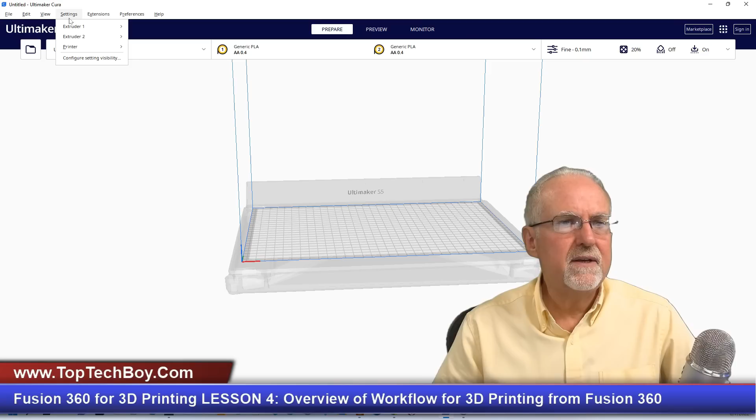And guys, I can't make these menus bigger and I can't make them higher contrast. So I'm going to tell you carefully what I am doing and then give you a chance to follow along. Up at the top, you click on settings, then you come to printer, and then under printer, you are going to say add a printer.

You see that you can add a networked printer or a non-networked printer. We are going to want to do a non-networked printer, so I'm going to expand that by clicking here. If you're working with me, we don't have the Ultimaker, we have the Creality. So we scroll down till we find Creality. There it is. It says Creality 3D. We're going to expand that, and then we'll come down looking for Creality Ender.

It looks like there is the Creality Ender 3, the Creality Ender 3 Max, the Creality Ender 3 Pro. I think that probably just the Creality Ender is going to be a good choice, and you could tweak things further. If you know exactly precisely what you have, you can select the other one. Or if you're doing a different printer, just find your printer on the list. This list has most printers.

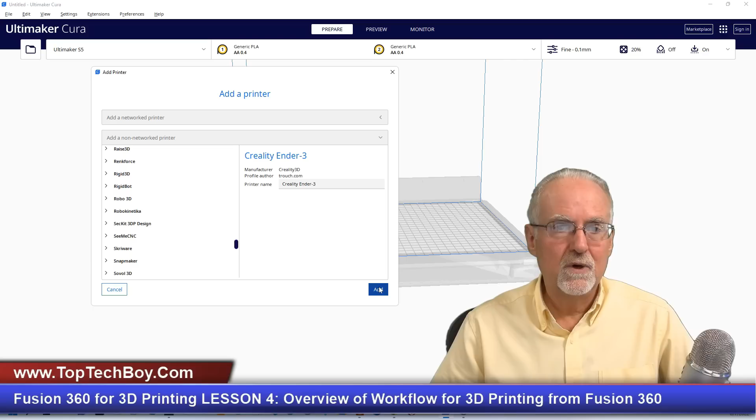Okay, that is pretty cool. We're going to say add, and now we're just going to go with the defaults. We're not going to really change anything here. We're just going to go with the defaults, and then we're going to say next. And now what we just make sure is we come over here, and we select that. You make sure of the available printers, you select that. So now this is ready to slice. So we've got Cura up.

So what is the overall design process? You go to Fusion 360, okay? You sketch a two-dimensional object. Then you extrude the two-dimensional sketch into a three-dimensional object. Now, you export that as an STL file because you can't print a Fusion 360 design file. You have to go from Fusion 360, you have to export a .stl file. Now that is going to be saved on your local computer.

Once you have that .stl file, you pull that .stl file into the Cura slicer, and you get it situated on the build plate. Then you have the STL file. Now you actually have to slice it, and that slicing process creates what is called G-code. And G-code is actually the specific detailed commands that are sent to the printer, like move to this XYZ position, extrude the filament, move, extrude, and it's got like the speeds, the extrude rate.

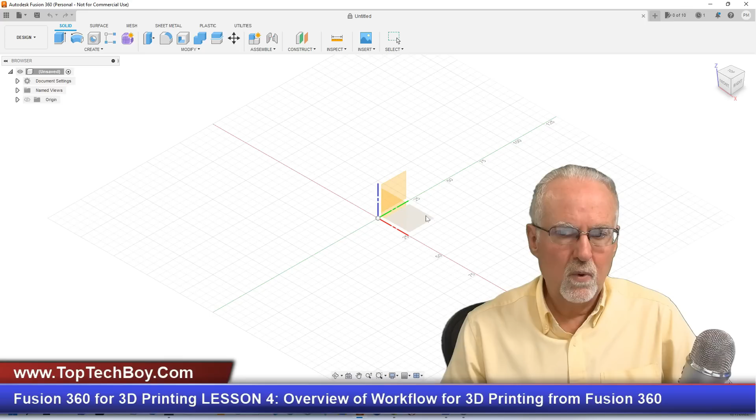So when I say create, it shows me this coordinate axis. Where do I want to design? I want to design on the XY plane, and that would be the what? The red-green plane. So I'll come over here and point. You see, when I point here, that is the plane between the red and the green axis, between the X and the Y axis. So pointing at that, I click, and then it gives me that plane to design on.

I'm kind of surprised. Usually I would have expected that to kind of make this sort of flat to me. And so I need to do that, and I think I would do that by clicking. You see this cube up here? I'm going to click on top, and now I'm looking straight down on what looks like a piece of graph paper. That is the XY plane. It gives me kind of a graph there that helps me draw.

So what did I want to do? I want to make a cylinder. A cylinder starts as a what? As a circle. Now, when I said create sketch, I want you to see that we are in sketch mode here. How do I know that? Well, these things change to two-dimensional objects from three-dimensional objects that they were a while ago. And I have this sketch palette here.

You have to always be mindful. Are you in sketch mode or are you in 3D mode? We said create sketch, so we are in sketch mode. And so we are given an option of two-dimensional figures that we can draw. And one of them is a circle. Now, besides these simple things, you can look here under create and see you can make a line, rectangle, circle, arc, polygon. There's all these different things you can sketch with, but we are starting very simply with a circle.

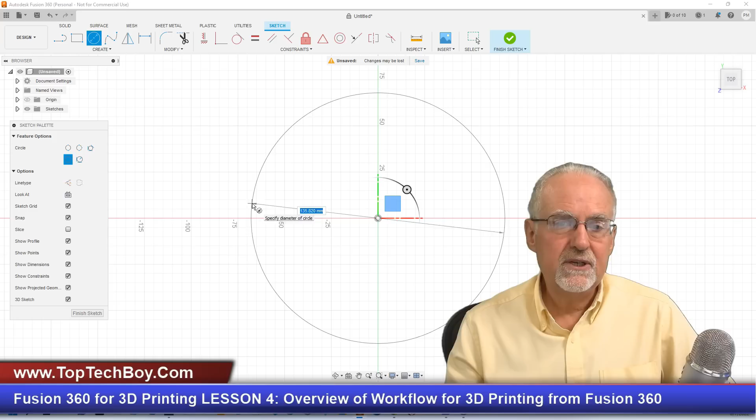The way we are deliberate about dimension is, instead of just clicking or eyeballing it, do you see that it is giving me, on this diameter that is drawn, a radius? It looks like that is a diameter, the way they've drawn it. Yes, and it says specify diameter of the circle. Well, I think I am going to make the circle 35 millimeters.

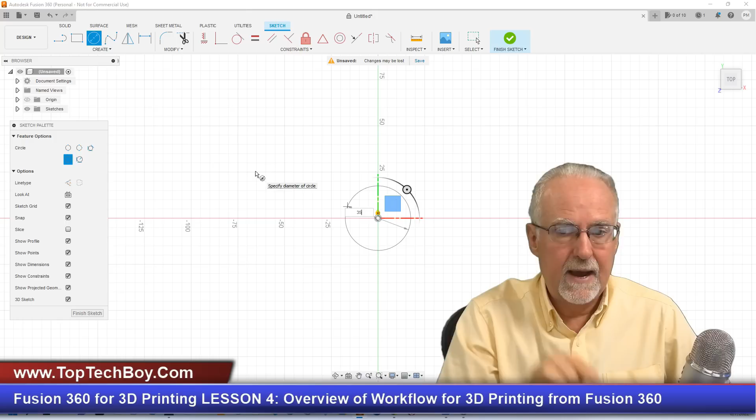Okay, 35 millimeters. Now I have been precise about what? About dimension. I click enter. And now I have this circle. The diameter is 35 millimeters and it is centered at the origin. Does that make sense? I hope it does.

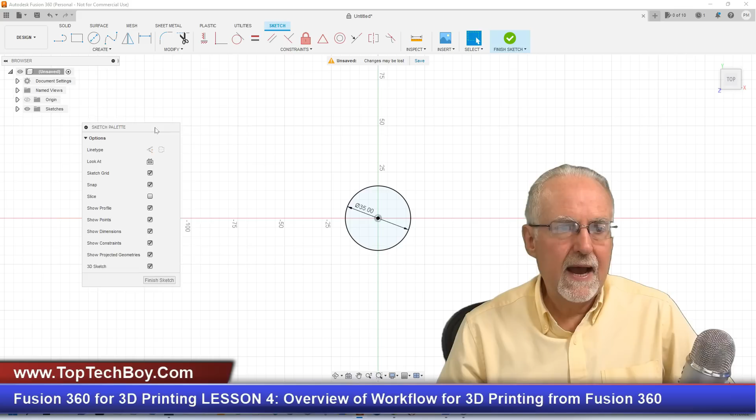Because we have been deliberate about the position and about the dimension, I want you to see that it turns black. And then if we look over here under sketches, you can see that my sketch 1, where we're working, has a little lock. And that little lock means that I have fully constrained it. I've been deliberate about where it is and what the size is. Okay, and that's very important.

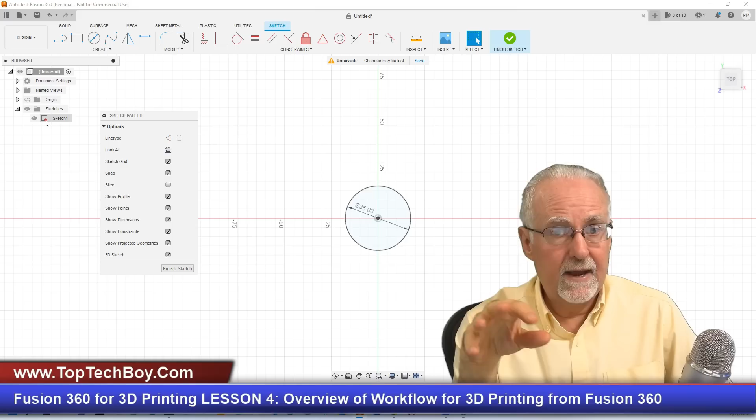You really don't want to move on until everything is black and you get that lock, that you have fully constrained your model. And then I could say finish sketch. Okay, and there is my sketch, but now I am back in what? 3D mode. And the way that I can see that better is if I come up here and I click on the little house, it gives me a 3D view from kind of a 45-degree angle, okay?

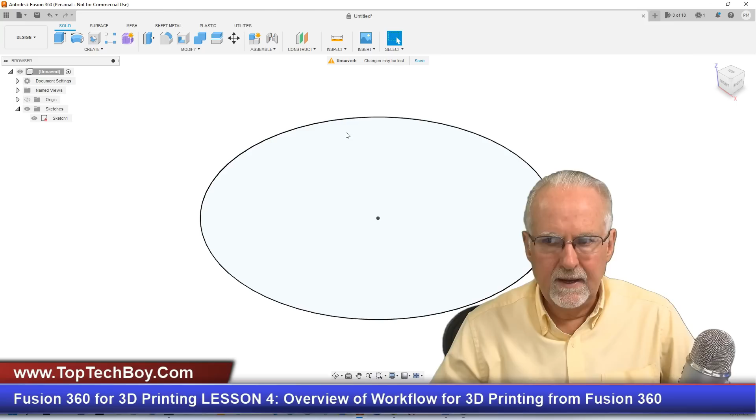But now I want to go back and edit that sketch, so I'm going to right mouse click on that sketch. I'm going to go back to sketch mode by saying edit sketch. Now you see I'm back in sketch mode. I've got my sketch palette, and I am going to click on that and click delete, and I am just going to delete it.

Now let me show you the wrong way to do it. We just get this and then we come up here, we click, and then we go like that. And then when I did that, notice now that it is blue and it is not black. And if we look over here at the little sketch label now, it doesn't have that little lock.

Why? Because I was very deliberate about position, but I was not deliberate about dimension. Well, it's best to put the dimension in when you create it, but I could come back now and put dimension by clicking on this sketch dimension tool here, and then clicking on the circle

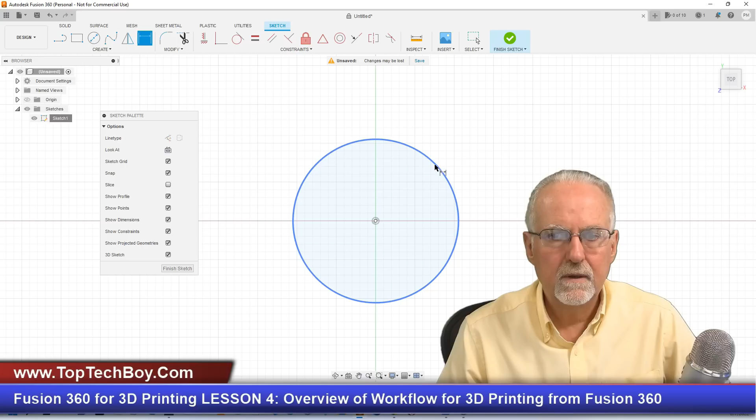like that. Okay, click on the radius of the circle, and now I've got a little dimension box, and I can say 35, enter, boom. What do I have? A solid black circle, and it is fully constrained because I have declared the dimension and the position. Okay, so now we're going to say finish sketch, and we're going to click on the little house to get a 3D view.

Now, how do you zoom in and how do you zoom out? It is the roller wheel on the mouse. So I can turn that wheel to zoom out. I can turn that wheel to zoom in. And also notice that how it zooms depends on where the mouse is. Here you see I'm to the left and it goes like that. If I come over here, it goes like that.

What if it's not in the center? How could I get it in the center? I could kind of zoom it over here and get it more in the center. You see how you can move it by zooming? And what if I just want it to zoom without moving? I could put it kind of in the center and then I can zoom it without moving. So that's just a little bit about mouse wheel zooms, and where the thing goes as you zoom depends on where your mouse is.

Okay, now this is a what? It's a two-dimensional object. It is a sketch. I want to create a three-dimensional object, so I come up here and I say extrude, okay?

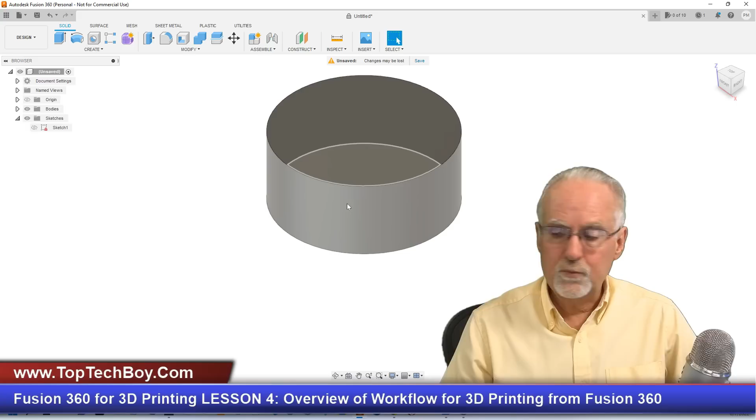But instead of just doing it visually, I'm going to come over here, and I'm going to put a number in, 15 millimeters. And then enter. Now this has a diameter of 35 and it has a height of 15. Very deliberate. And so now this would be something that is ready to print, but I can't help it. We're just going to do a little more in Fusion 360 and then we'll move over and print.

Okay, so I'm going to go back here. And now I'm going to go back to the sketch view. How do I do that? I can point at my sketch, and I could have lots of sketches, and so it's good if you name them, but this is the only sketch, so I point at it, I right mouse click, and I say edit sketch. Now I am ready to edit the sketch.

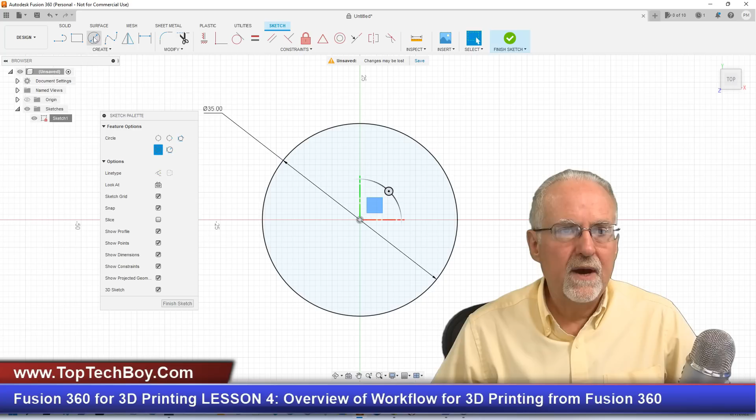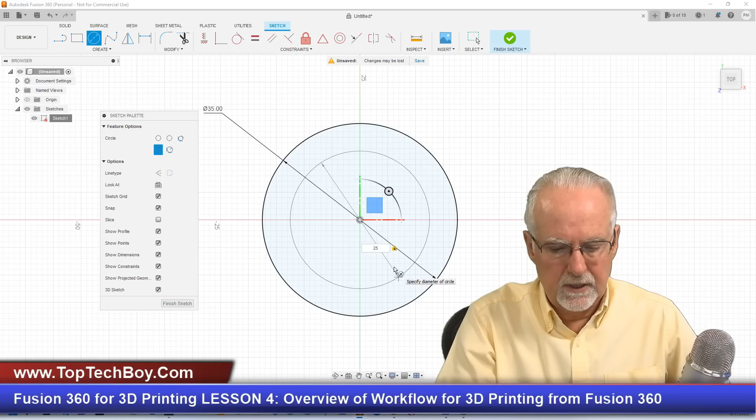What I'm going to do is I am going to create another circle, and then I'm going to be deliberate about position. I'm starting at the origin. I click, I drag, and now what am I going to do? This was 35 outside diameter, and so I want an inside diameter. What if I make it 25? Hey, that looks pretty good. Now I have a circle inside of a circle. And look, it's fully constrained because I have the little lock here. Very good. Now I'm going to say finish sketch.

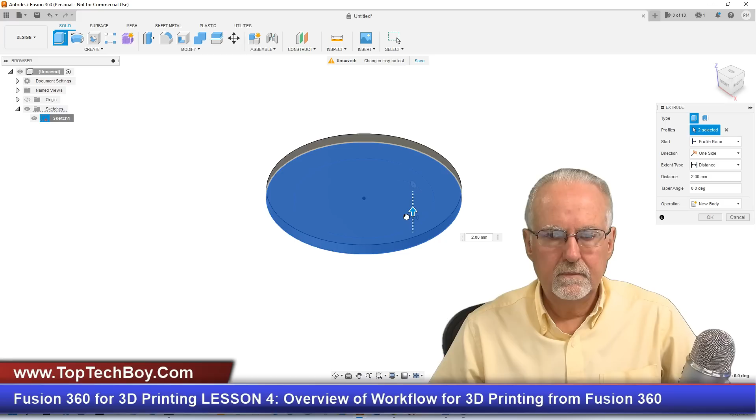Now what could I do? I could select the inside circle, and I could extrude. I could select the outside circle and I could, let's see, oh, I had them both. Okay, so let me go back and just start over here. Okay, so I could select the inside circle. I could extrude. I could click off of that and I could select the outside circle. And sometimes you just need to back up completely.

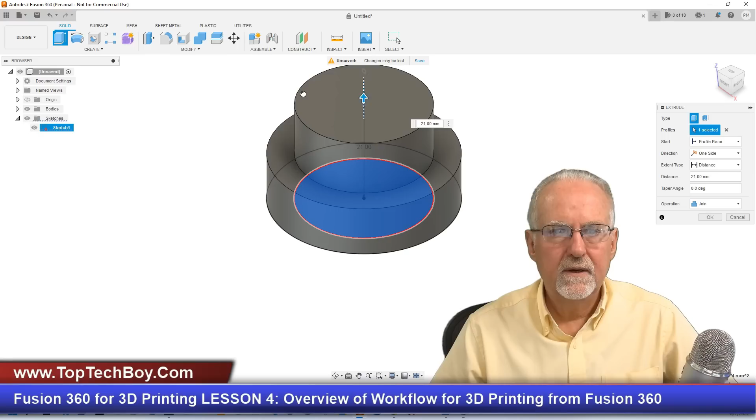Okay, finish sketch. Now what I can do is select the outside circle, extrude, and let's say that I extrude it by 10. Or I could select the inside, and it helps if you can see the sketch. So you see the sketch is not visible. I come over here and click on the sketch, and now you can see it. I can select the inside and I can extrude, and then I could extrude it on up like this, or I could extrude it a small amount, okay? And let's say that we could do like 3 millimeters, like that.

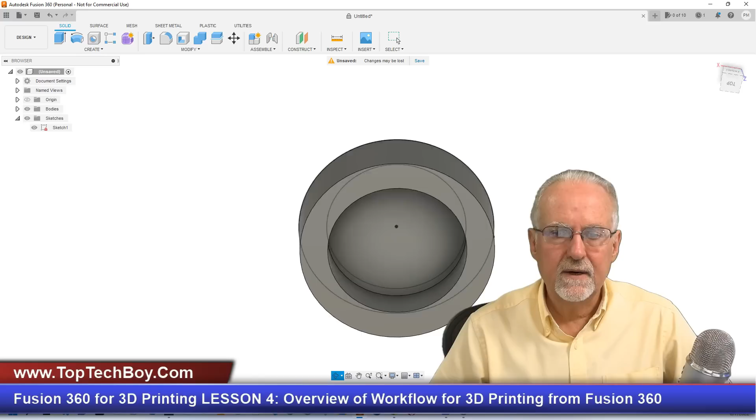Now what have I created? I've created sort of a cup-like object. Now what if I want to move around and look inside of it? You come down and you click on the orbit tool. Do you see down at the bottom here, it looks like sort of a circle and a circle? I click on that. Now if I left mouse click, I can move this around. Now you need to kind of get good at this, and it also depends on where you start your click. You see here it behaves a little differently than here. Okay, so you got to get kind of good at this.

And you can also do that by coming up to this box up here, and you can sort of rotate your box around. Or you can go top view, back view, right view, front, left, or always a good view is if you click here and just go home, and you can see it like that. Okay, now was I deliberate about this extrusion? I probably wasn't, and so let's do this again and be more deliberate.

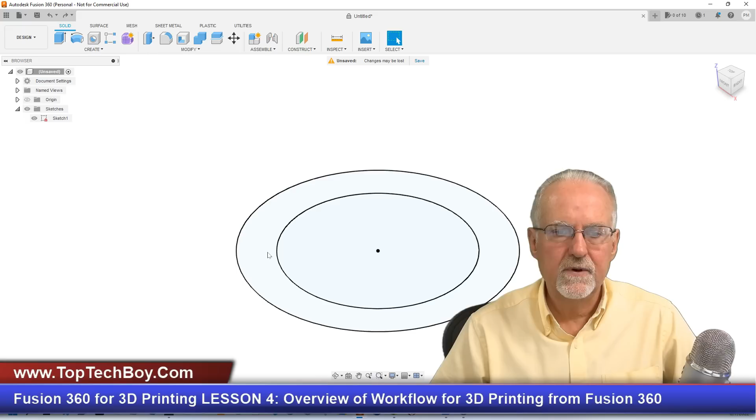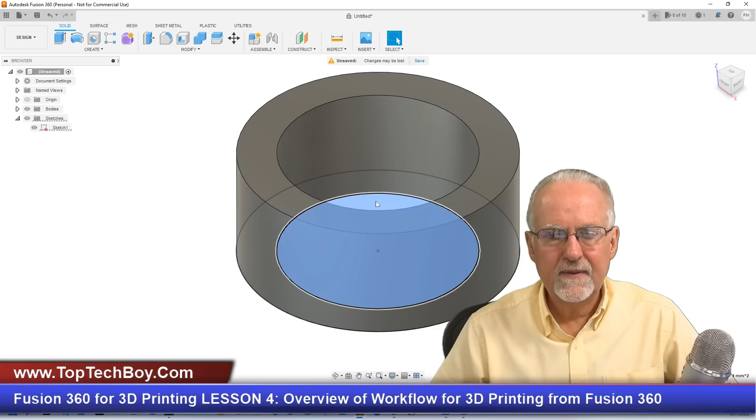Okay, so first of all, I'm going to extrude this, and I'm going to extrude this 15. Okay, that looks good. Enter. And then I'm going to make sure that I can see my sketch. So I'm going to turn on my sketch. This is not going into sketch mode. This is just showing the sketch. So showing the sketch right here, I can select that inner circle. And then what I can do is extrude, and let's just make it 3 millimeters like that. And now I have made a little cup.

Let's look at it. Okay, that looks pretty interesting. And so we've got it dimensioned, we've got it positioned. And so I think this would be a pretty cool thing to be our first print. So what do I need to do? I need to come over here, and you see this little page icon. I need to first of all see if I can save this.

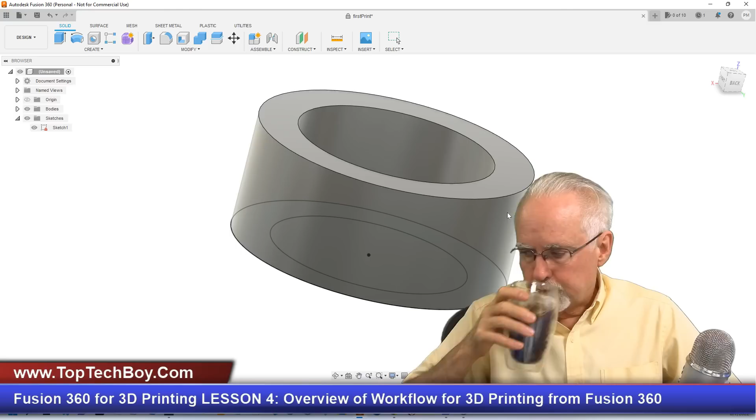And so I'm going to do a save. And then I'm just going to save this as first print. And this will save as a Fusion 360 design file. It should be saved, and so now I am going to export it. Always save it before you export it, because things like the STL file you can't necessarily go in and edit. So you always want to save your original design file.

Now I'm going to do what? I'm going to come down, I'm going to export it. And now this is first print V1. It puts a version 1 there. I kind of like how it does that. And then here you give the folder, and you need to create a design folder. Like you can see, I am working in my Fusion 360 folder, and that's a good place to save it. And now I'm going to say export.

Okay, now I will give you a little heads up. It takes a little bit longer than you would think sometimes to export. Sometimes there's another little thing that came up, but let me make sure that I got that. I'm going to do it one more time just because I'm OCD. Export. That looks good, and it's version 1. Okay. I'm sorry. Export. First print version 1. I set this up, but we are exporting as an STL file. I thought I'd done something strange.

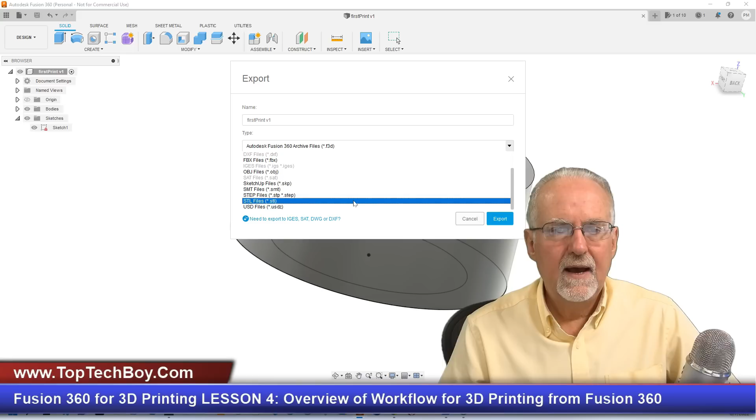So you see STL file. So I export it as an STL file. It's first print version 1. I come over here and I say export. Now what it usually does is it takes a little bit longer than you would think to do this, but it gives you this little dialog box status. And so you've got to realize that it's going to take a second for this thing to export.

And while we are waiting, I think it's doing this up in the cloud or something, so maybe it goes faster if you have a faster internet connection. Looks like it has started. But what you need to do is go ahead and get your SD card ready. Remember that SD card, we had left it in the Creality printer last time, so you need to go ahead and take it out. I always turn the printer off, and then when it stops, then I take it out.

And now I'm going to get this ready to put in my computer so I can put that G-code on there in a minute. So I'm getting this all ready to go here in my handy dandy little adapter. What's the good news? The good news is that our export is complete, so we're going to close it. I'm now going to minimize Fusion 360, and now I'm going to open up Cura.

Now what I should say is Fusion 360 actually has a slicer, and so you could set this up where we could generate the STL file, slice it to create the G-code, and then send the G-code to the printer. And so you could get this set up to where it would be almost like printing a piece of paper, where you would just say print this thing. So why am I not using the Fusion 360 slicer?

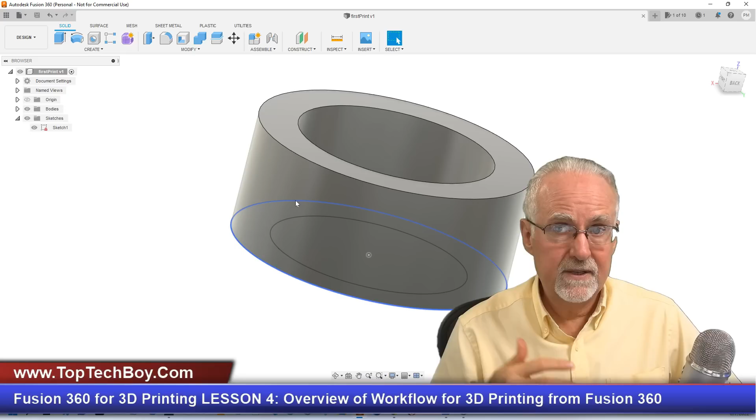So what I do is I export from Fusion 360. Then I come over to Cura, and now I have to find that file. And so I will open up a file explorer here, and I will navigate to that. I'll bring it over into your view here in just a second.

Okay, so here is my Top Tech Boy folder, and then there is Fusion 360. And then what do we have here? We have this first print F3D, which was my misstep. Okay, and then I have my first print version 1 STL. I just click, hold the click down, drag, and just anywhere here you drop it. Okay, and boom, there it is.

Now, how do we find our way around on our view in the Cura slicer? Turn the mouse wheel and you zoom in and out. If you use the right mouse button, you rotate. Right mouse button is rotate. Center mouse wheel scroll is zoom. And left mouse button is to, let's see. How do I move this?

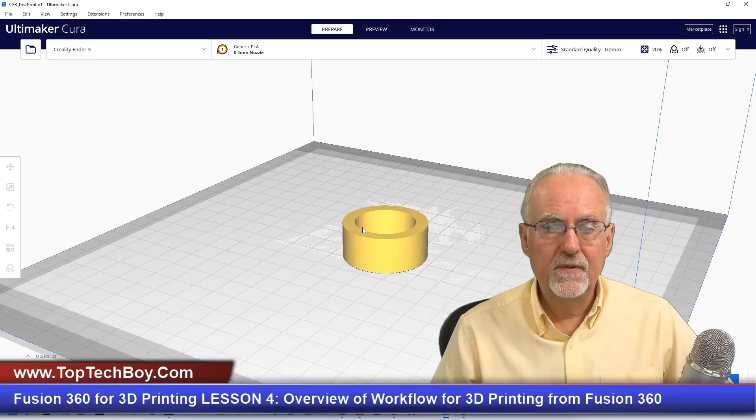Okay, click the mouse wheel. And if you click the mouse wheel, you can pan. Click the mouse wheel to pan, right mouse click to rotate, and then turn the mouse wheel to zoom. And now if you want to move the print on the bed plate, you click on it, and then you can move it. Okay, but I'm going to be printing here in the center.

So we have the STL file loaded. Now we need to generate the what? We need to generate the G code. Now, I need to make sure that I have my Creality Ender selected. So I've selected the printer.

Now we need to come over here and do the print quality. You can see that it is on standard print quality, but I really want to see initially how much precision and how much quality I can get out of this printer. And so instead of standard quality, I'm going to go to super quality, 0.12 millimeters. And what is the downside of doing that? Your prints are slower. The higher the quality, the slower the print.

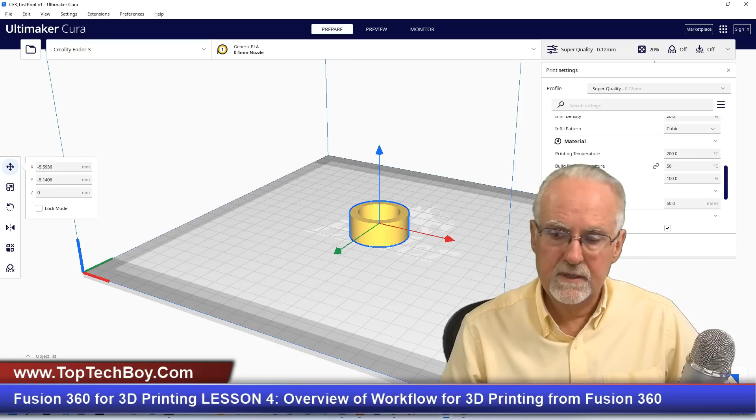Now, there are a lot of different settings here to tweak how the slicing is done. But we're not going to go into those because these default ones will be fine to start. As we move on, we're going to learn more about how to tweak these things, but this is pretty good. And so now I come over here and I say slice. Okay, and then the slice is done, and we can preview the slice. And this is something that I think is cool.

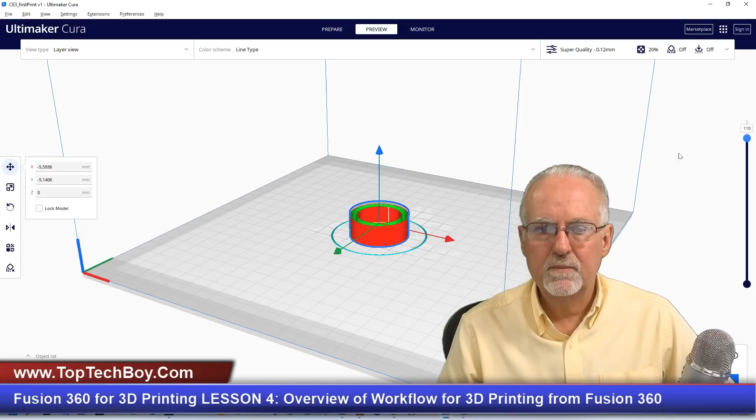I'm going to minimize the parameters, and what you can do is come down here and actually see what your print is going to look like. And then, let's see, like this. You can actually look down on it, and it sort of shows you what the different layers are. Now, for some reason, it's not giving me a preview of the infill.

Usually it'll show you the preview of the infill, but for some reason, I'm not getting it. I think this red is indicating there's something it doesn't like about this, so the STL file that Fusion 360 generated is not viewed as perfect by the Cura software, but it's gonna work fine. In future lessons, we can dig into this and get more precision. But for right now, we are just trying to get our first print.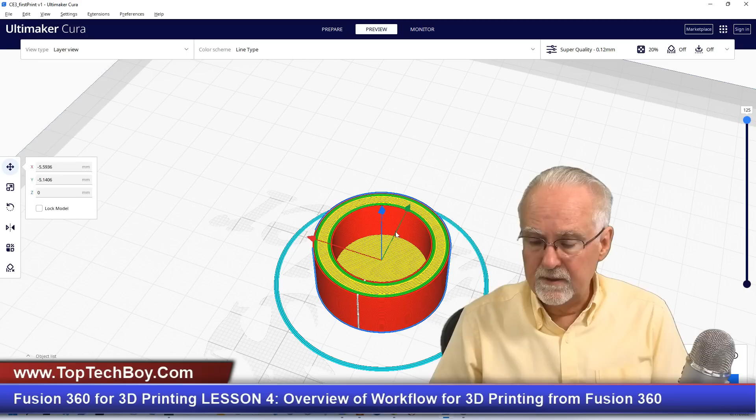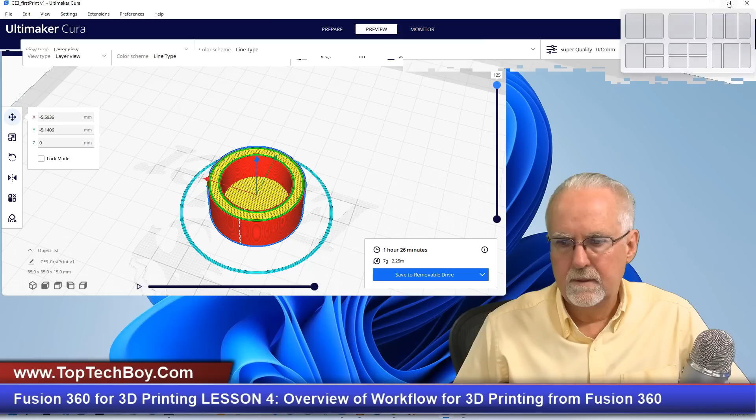We had the STL file, we sliced it, it generated the G-code. Now we've got to get the G-code on the SD card. So I need to awkwardly lean over here and see if I can blindly find the USB port on my computer. Okay, I heard the happy little noise there. And then look, I guess you can't see that. So let me make this where you can see it.

Okay. Now, do you see this had said save to disk, but once I plug the USB in, it says save to removable drive. So I can save to disk or save to removable drive. I want to save to the removable drive. So I click that, and then it has saved. And I really like this. This is super cool.

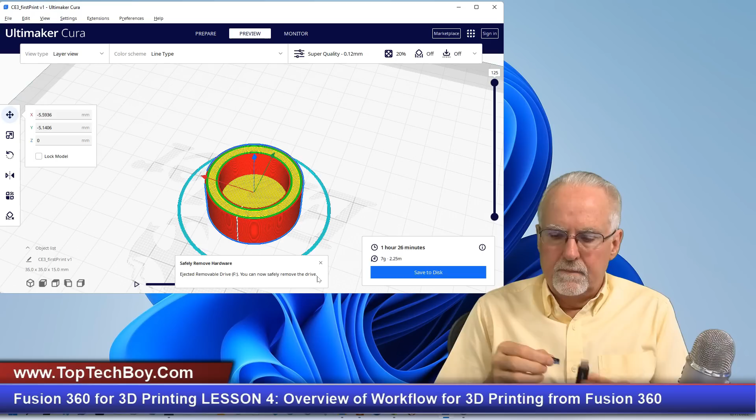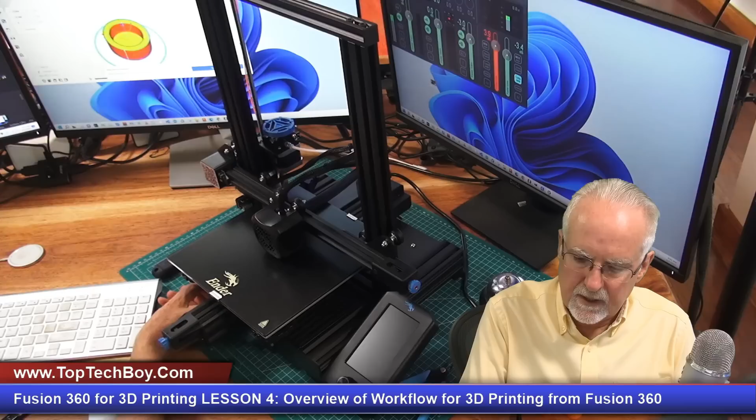It gives you the ability to eject that SD card right here from the software. So I say eject, and it says safely remove the hardware. So I'm going to go get it. And then here it is. I'm going to put it back in the printer. And so I think you all would probably enjoy this view here right now. And then I will put this in. And remember, it goes with the pins, the copper connectors up as you put it in.

And let's see, I only have one available USB in the front, and so therefore I need to come in, and I think I will try to plug in my webcam again. Okay, like that, so I can give you a little bit of a webcam view. And then remember, we had this dual view where you can kind of see what's going on. All right, now what I need to do is I need to turn the printer on like that.

And what's the most important thing now? I just print, right? I come over here and print, right? No, what do I need to do? Every print I need to level the bed. And so I'll give you a view from over here. And so what I'm going to do is, I guess I should show you my little menu here. Okay, so I'm going to come up to prepare, and I'm going to say auto home.

Okay, it's got it all set now. I come up and disable stepper, and now I'll move it over here. And you should still be able to see what I am doing. But now what I'm going to do is I'm going to manually move this over here, and I'm going to start leveling. So like right now, at this corner, I'm feeling just a little bit of resistance. I like that. Over here, I have a little bit too much resistance.

That's interesting. The slicer has it at 50, and I'd actually thought that this used 60, and so let me come back over here to Cura. Let's see, there you can see it. So let's look here under settings. Print speed is 50. Okay, build plate temperature is 50. I thought that was 60. But 50, 60, that's something that we can tweak if needed.

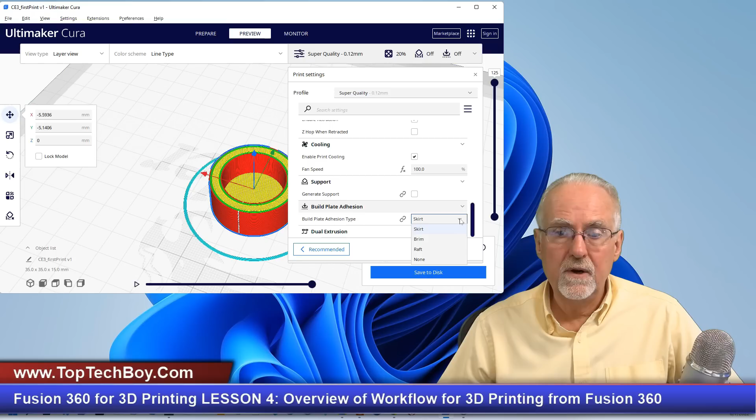Just looking here at the other default settings. I guess I can tell you one thing here on adhesion, what these terms mean while we're waiting for my printer to heat up. You see that you have 4 different choices: skirt, brim, raft, and none. Now, what none is, it just goes in and starts printing your item.

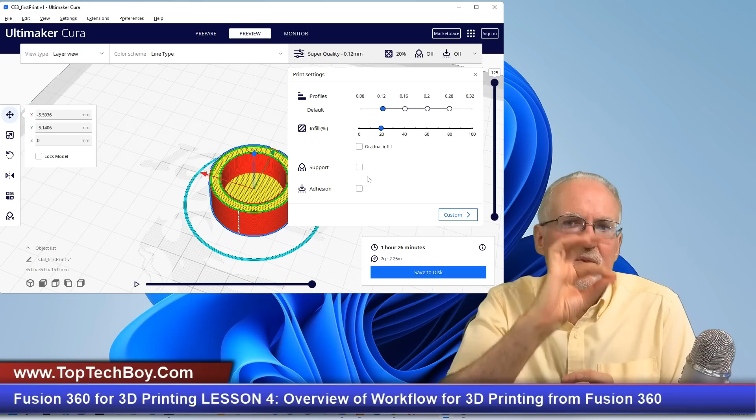What a skirt is, which we were selected... I guess I changed that, so I have to reslice it. Okay, what a skirt does is it starts by making this ring. And I really like that because if there's something globby on the end of the extruder, or it takes a little bit just to get your extrusion going, you start there in that general region. And now let me come back over here. You can see that it's going to start and it's going to make that skirt. That gets the nozzle clean, gets things flowing well, and then it moves in and starts doing your actual design.

The difference between a skirt and a brim would be the brim goes all the way to the design and connects, which gives you more of a practice area. Okay, now let's see here. That is looking like a very fine circle. Okay, so that is the skirt. Now a brim would be all the way from the outside of the skirt to your design, so you have a larger practice area. But since it connects to your design, when you break the brim off, you've got a rough edge. So I like doing skirt and not brim.

Then what is raft? Raft builds like a lattice, and then you build above that lattice. So if you're having really bad problems with adhesion, or really bad other problems, you build a raft and then you build on top of that raft. Really, I think people use rafts when they shouldn't. If you have your printer tuned in right, you should not have to build a raft. You should be able to build what you are trying to build directly on the build plate. So when I see people using rafts, I think that's someone who is not keeping their printer tweaked up right.

And this has gone very well. I am now at 98%. And so the print is just about finished, and it has gone most beautifully. One of the things that you kind of notice is over here when it was making the skirt, it's got a little bit of an imperfection. Well, that's kind of the purpose of the skirt.

Any little globs, any imperfections you get out of the way at the skirt, and then when you start printing your main design, your main item, your nozzle is working and flowing smoothly. And so I really, really like putting those skirts on there, because oftentimes when you first start extruding and printing, there is a little bit of an imperfection. And so the skirts work really well for me.

I was telling you that the skirt, all the way to the print, would be a brim. And I usually don't like to do the whole brim, because then you end up having to deal with it, knocking it off. And in most cases for me, the skirt by itself will really work. And like I said, if you're using a raft and printing on a raft, then usually you haven't really invested the time in your printer to get it tweaked up and aligned perfectly, and that's probably why you're having to do a raft.

It is now finishing up that top layer, that final layer, and we should any minute now see this thing pop out. And then we'll talk a little bit about looking at the print before we take it off. There's a little bit of an inspection that I like to do. Okay, so we have a successful print.

Okay, guys, let me say a couple more things about slicing, because while I was sitting here enjoying my coffee, I told you I wasn't sure why the infill wasn't showing as we were doing the preview. Let me go back to Cura here and show you what was going on. So we can come in, and if you remember, we can come up and say preview, and then if we come over here, we can see the different layers. As we pull this down, we can see the different print layers.

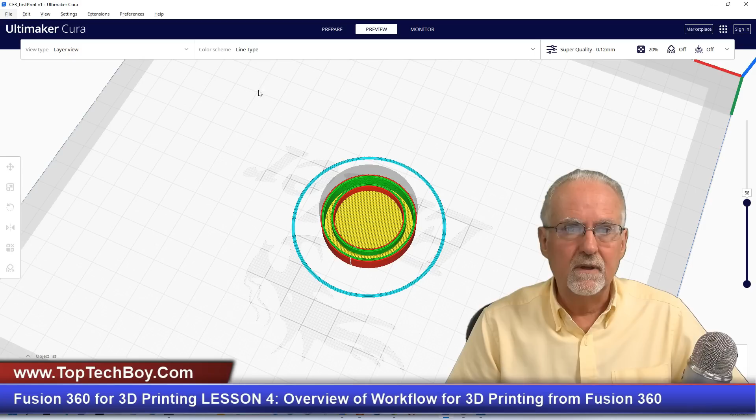And what I was confused about earlier was when I look in here, between the inside wall and the outside wall, it was empty and it was not showing the infill. Well, you need to come up here under color scheme, line type, and say show infill. And then when you show the infill, it shows you how it is filling it in. So this is the kind of structural material between your outer shells and your inner shells that gives your design strength, and you can see that infill.

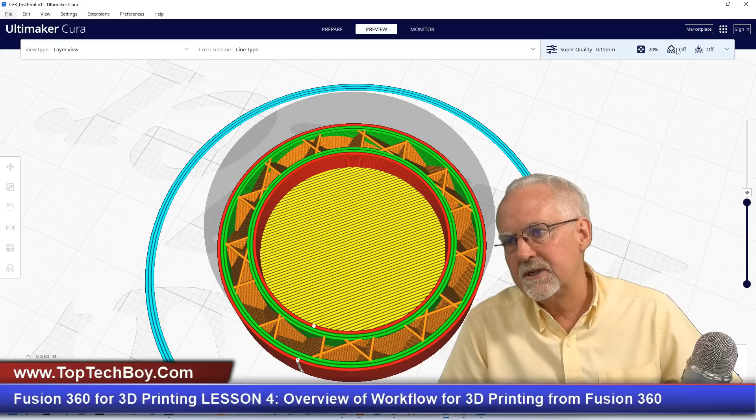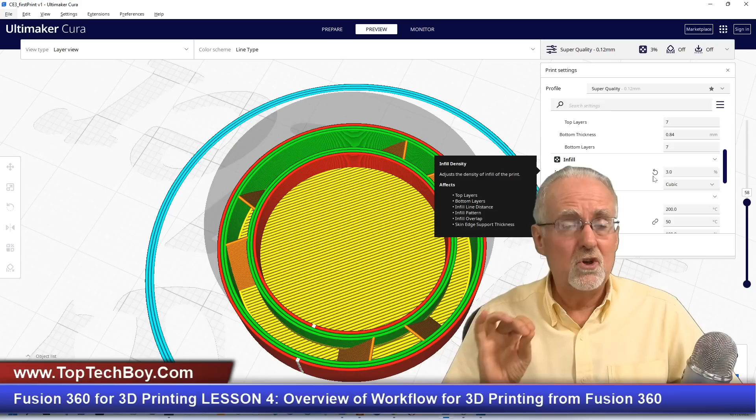Now, actually, I think it's quite fun to play around with the different infills, so let's just take a look here. I'm going to look at my parameters, and you can see infill density. 20% is actually pretty dense. Let's see what it looks like if we say 3%. If we change that, we are going to have to reslice, and that's the little thing behind me. And you see with a 3% infill, it's much, much less structure in there. Good news is you save filament. Good news is it prints faster. Bad news is it's not quite as strong.

So let's maybe go in and say 7%. I kind of think 7% might be a reasonable thing for a lot of things. And you can see that that is showing that. I'm going to go back to the 15% so we can more fully see the structure that it is creating. And then I slice it again. The slice button is behind me, so you're not seeing it.

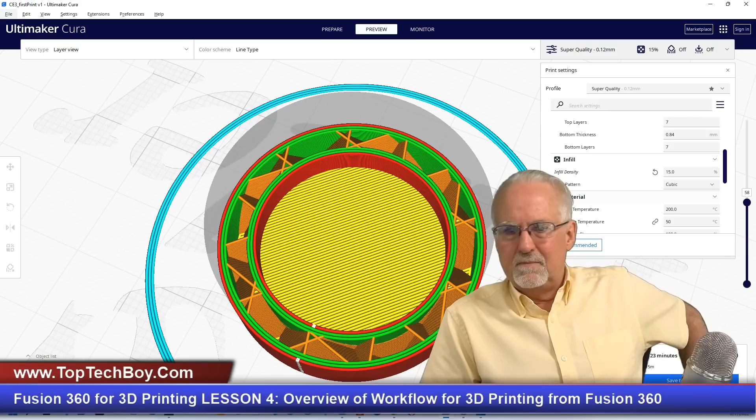Okay, this is what I think doesn't matter very much, but to me it's just incredibly interesting, and that is to look at all the different ways you can do the infill. Like we can do a grid, and I'm going to look at a grid here. Back in the old days, really everything was a grid, and that is just kind of like a lattice of squares. And so that would be the grid. Let me change this to 25 so you can see it a little better.

Okay, you can see that a little bit better. You could do lines, which are just parallel lines. You could imagine triangles. The cubic is an interesting one. And then you can do like an octet, which is interesting. And really, I don't think these things matter, but I just find it interesting looking at the different geometries that can be created as you are printing. No one really sees it after that. The quarter cubic is also an interesting one.

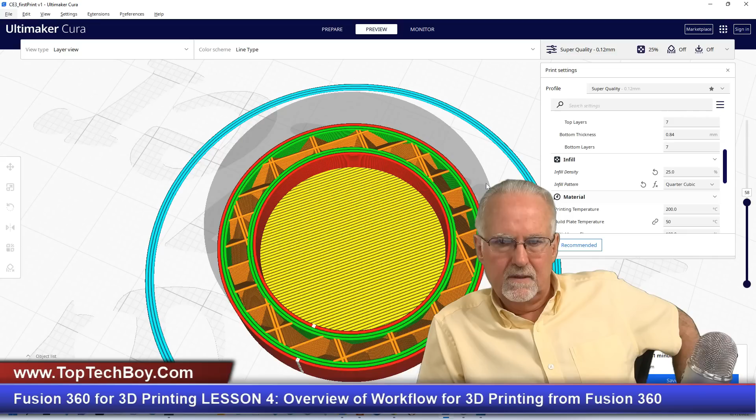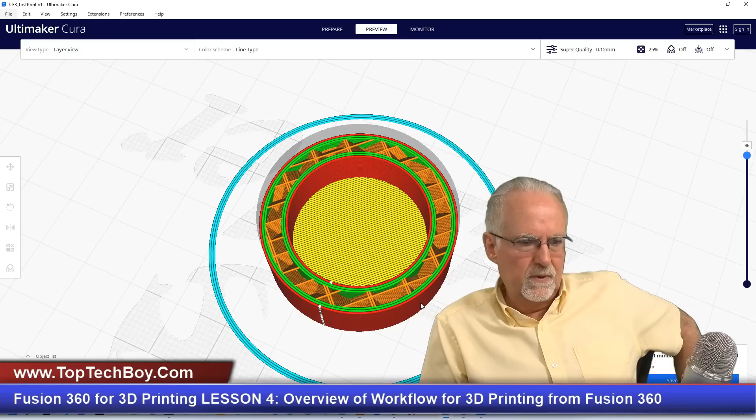Okay, and so now let's come back over here and you can look at what it looks like at different levels, all the way down to your first level. And then you can see that base is getting infilled. And then we put the lid on the base and then we build on up. And also interesting, I think I'll have to turn my title off for you to see it. Also interesting here is if you look here, you can actually play a level, which shows you step by step where your print head is going to go.

So let's go down to our very first level, and then we can bring this back to the left, and we can actually see if we press play, it starts by making the skirt, and you're actually looking at the travel that the print head is going to take and what it's going to print when. And I think I can maybe speed this up if I pull it like that.

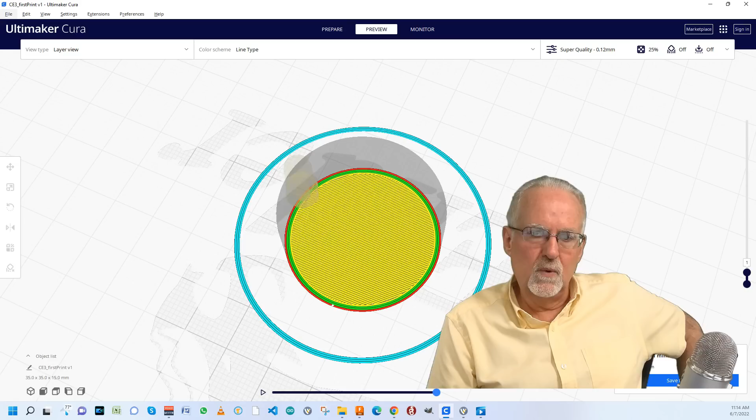So now you see it did the skirt, and now it starts with the outside of the main print, does that outside ring, and then it infills that lower level, lower layer, and now it's ready to go to layer number 2. And so I think that that is just pretty darn neat.